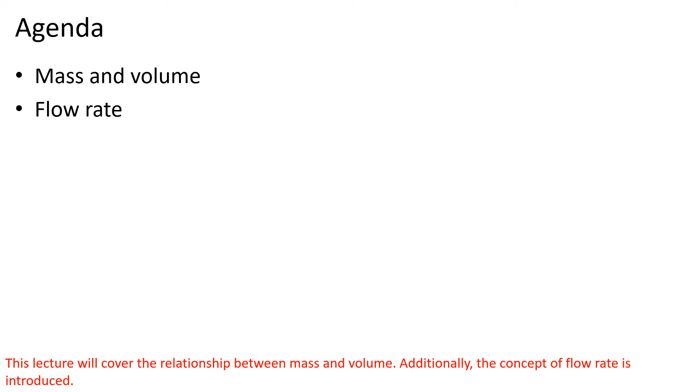Density is an intensive material property, equal to the ratio of mass to volume for a sample of the material. Being an intensive property, it is independent of the mass of material. Density is calculated by measuring volume and mass for a given sample. The inverse of density is referred to as the specific volume and is equal to the ratio of volume to mass. Common units for density are kilograms per cubic meter and pounds mass per cubic foot.

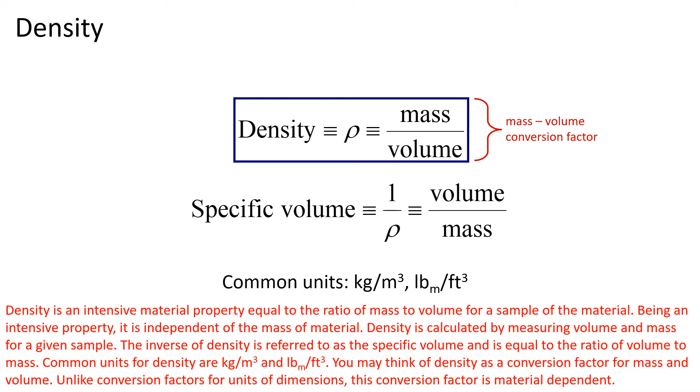You may think of density as a conversion factor for mass and volume. Unlike conversion factors for units of dimensions, this conversion factor is material dependent. Density is material dependent, but also depends on temperature and pressure. The density of a liquid or solid is slightly dependent on temperature and pressure. The temperature dependence typically is greater.

Gas density is strongly dependent on pressure and temperature. The dependence is given approximately by the ideal gas law as density is equal to the pressure divided by the ideal gas constant R divided by temperature.

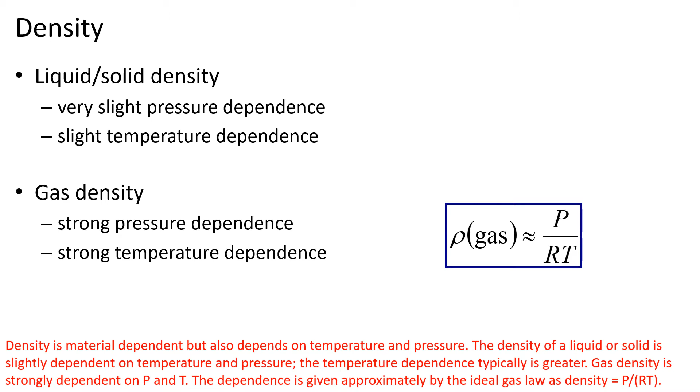Values for density commonly are reported in reference books or the literature as specific gravities. Specific gravity is equal to the material density divided by a reference density. It may be considered a relative density. Specific gravity is abbreviated as SG. The value for the reference density must be provided along with the specific gravity to calculate density from specific gravity.

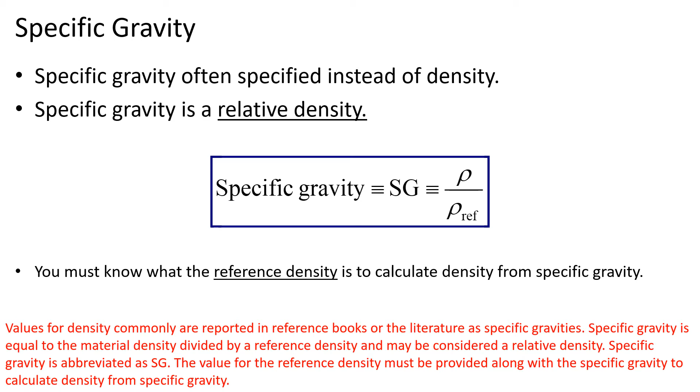Commonly, the density of water at 4 centigrade is used as the reference density. At 4 degrees C, water has a density of 1,000 kilograms per cubic meter or 62.4 pounds mass per cubic foot. The notation SG(20°/4°) is used to indicate the reported specific gravity is for a material density measured at 20 degrees C, and a reference density of water at 4 degrees C.

To calculate the specific gravity for a material at 20 degrees C using water as a reference at 4 degrees C, the density at 20 degrees C in units of kilograms per cubic meter is divided by 1,000 kilograms per cubic meter. Note that specific gravity is dimensionless.

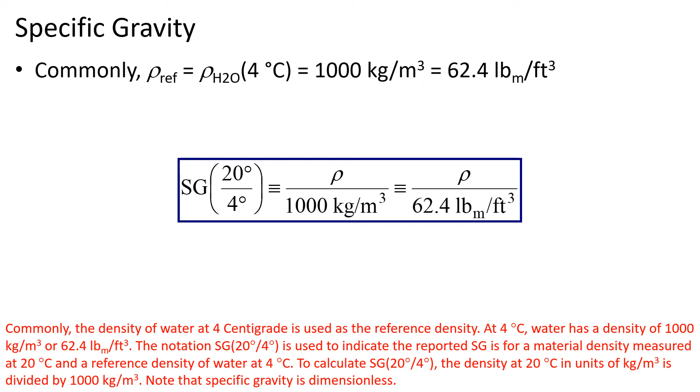In Lecture 1, we introduced the general process flow diagram above to illustrate a generic process for converting raw materials into higher value products. Most processes will consist of a reaction section in which a chemical or physical transformation converts some of the raw material into the desired products, and a separation section in which the desired products are purified. For continuous processes, the sections are connected by pipes, and material flows within each section and between them through pipes. To design such processes, we must understand the terminology for specifying flow rates in pipes.

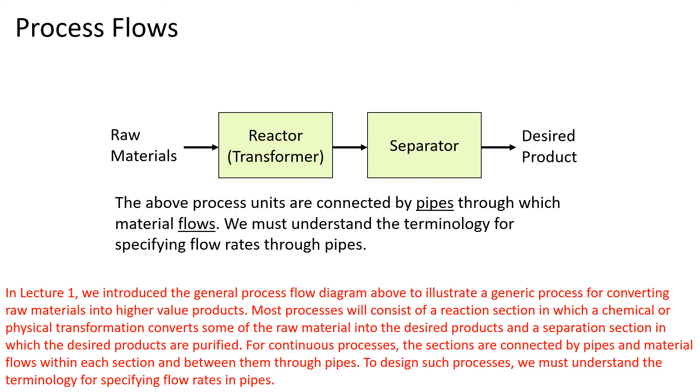Flow rate is the rate at which material moves. A rate is defined to be an amount divided by a time. Two types of flow rates are used in engineering calculations: mass and volume. Mass flow rate is the amount of mass that flows divided by the time interval over which the flow occurred. Similarly, volumetric flow rate is the ratio of volume that flows to the time interval over which the flow occurred.

Density is used to convert a mass to volume flow rate and vice versa. Note that a dot over the letter M or V is used to differentiate flow from amount, and we will refer to mass flow rate as M dot and volume flow rate as V dot.

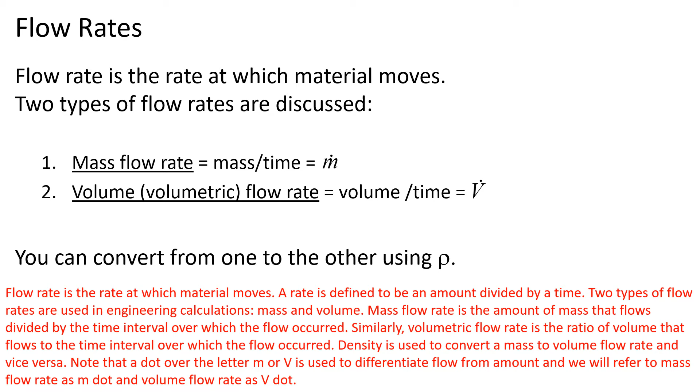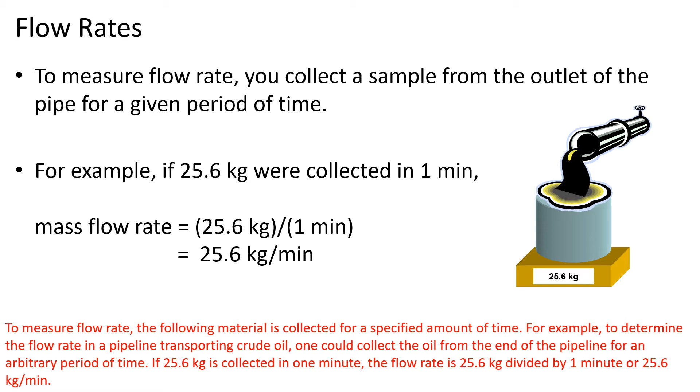To measure flow rate, the flowing material is collected for a specified amount of time. For example, to determine the flow rate in a pipeline transporting crude oil, one could collect the oil from the end of the pipeline for an arbitrary period of time. If 25.6 kilograms is collected in 1 minute, the flow rate is 25.6 kilograms divided by 1 minute, or 25.6 kilograms per minute.

If volume is measured instead of mass, the volumetric flow rate can be calculated from volume divided by time. If both measurements are made, mass and volumetric flow rate can be calculated. Dividing the calculated mass flow rate by the volumetric flow rate, the collection time used for the measurement cancels to yield the ratio of mass to volume, the material density. Thus, mass flow rate is equal to volumetric flow rate multiplied by density, just as mass is equal to volume multiplied by density.

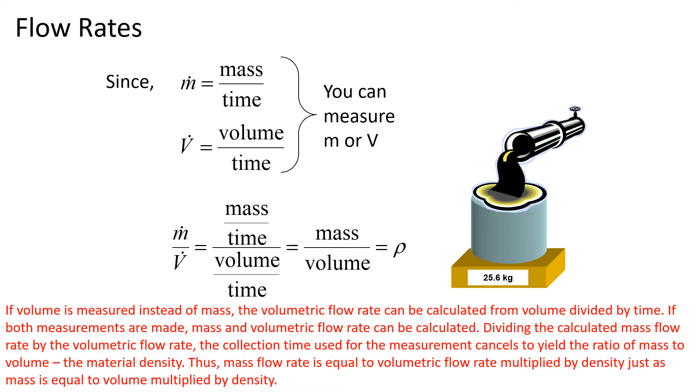Instead of volumetric flow rate, bulk velocity, V sub B, may be used to specify flow rate. The cross-sectional area of the pipe also must be provided to calculate flow rate. Longitudinal, along the z-axis of the pipe, and transverse cross-sections of the pipe are shown here on the left and right respectively. The diameter of the pipe is given as 2 times r, where r is the pipe radius.

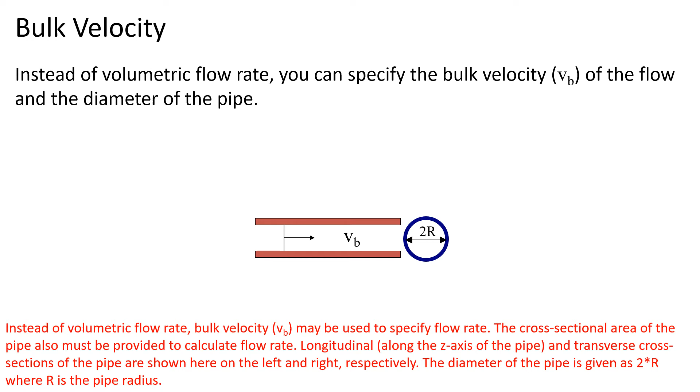To understand the relationship between volumetric flow rate and bulk velocity, imagine a piston pushing material through the pipe. The piston moves with a velocity equal to v sub b. In a time interval t, the piston will move a distance L, equal to v sub b times t, or equivalently, t is equal to L divided by v sub b. The volume displaced by the piston is equal to the volume of a cylinder with diameter 2r and length L, or equivalently, V is equal to pi times r squared times L.

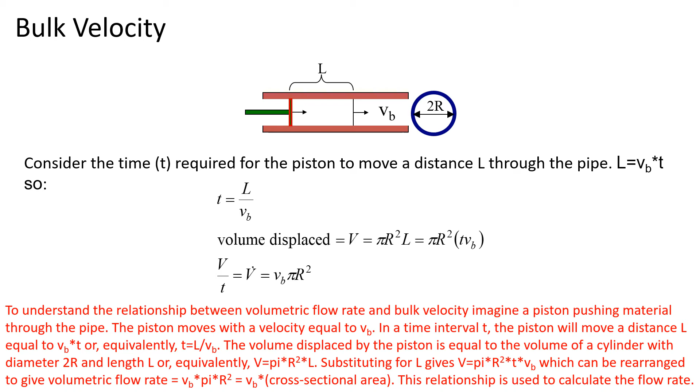Substituting for L gives V is equal to pi times r squared times t times v sub b, which can be rearranged to give volumetric flow rate is equal to v sub b times pi times r squared, which also equals v sub b times the cross-sectional area. This relationship is used to calculate the flow rate.

Process streams commonly are mixtures of different chemical species. We will differentiate the flow rate of a specific component from the total flow rate of the stream through a subscript on the flow rate. The flow rate of an arbitrary component I is referred to as m dot sub I.

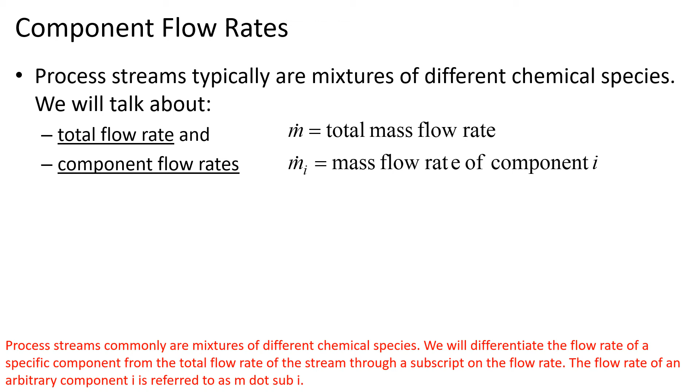If a stream consists of water and methanol, the total flow rate of the stream is given by m dot. Using the letter W to represent water, the flow rate of water in the stream is given by m dot sub W. Likewise, using the letter M to represent methanol, the flow rate of methanol is given by m dot sub M.

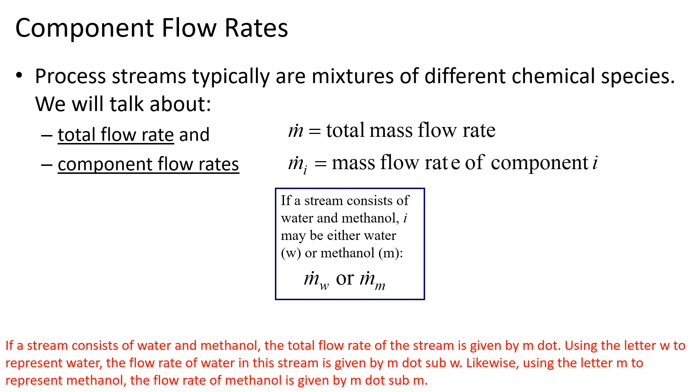The flow rate of a component can be calculated from the total mass or volumetric flow rate. The flow rate of a component I is equal to the total mass flow rate, m dot, multiplied by the mass fraction of component I, x sub I. Mass fraction is defined as the fraction of the total mass which comes from component I. The flow rate of component I also can be calculated by multiplying the total volumetric flow rate by the concentration of component I, C sub I.

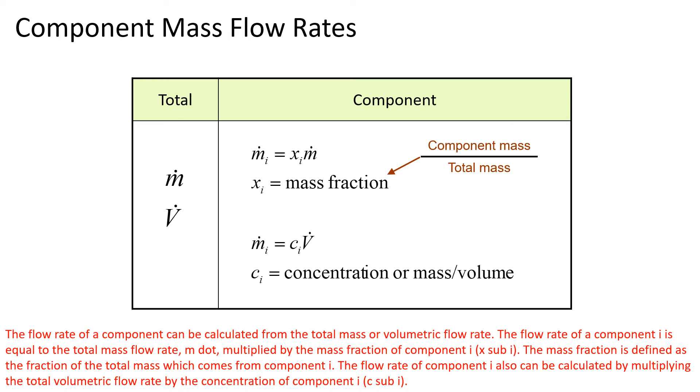Process calculations often require component flow rates in terms of moles instead of mass. The conversion requires knowledge of molecular weights, which are calculated from atomic weights. It is more accurate to speak of atomic mass and molecular mass since weight is a unit of force, but weight frequently is used. The mass of individual atoms is based on assigning a mass of 12 to carbon-12. Molecular weight is the sum of the atomic weights of all atoms contained in a molecule. Molecular weight often is represented by the letter M or letters MW.

The units of molecular weight may be grams per mole, kilograms per kilomole, or pounds per pound mole. The numerical value does not depend on which units are used. A gram mole is the amount of material that has a mass in grams equal to its molecular weight. 1 gram mole contains approximately 6.02 times 10 to the power 23 molecules. This value is defined to be Avogadro's number. Note the conversion factors between moles, kilomoles, and pound moles have the same numerical values as those for grams, kilograms, and pounds.

For example, the molecular weight of an oxygen molecule, O2, is equal to 2 times the atomic weight of an oxygen atom, and is equal to 2 times 16, or 32. The units may be grams per mole, kilograms per kmol, or pounds mass per pound mole. The equality of the values for molecular weight requires that 1 kmol equal 1,000 moles, and 1 kmol equal 2.205 pound moles.

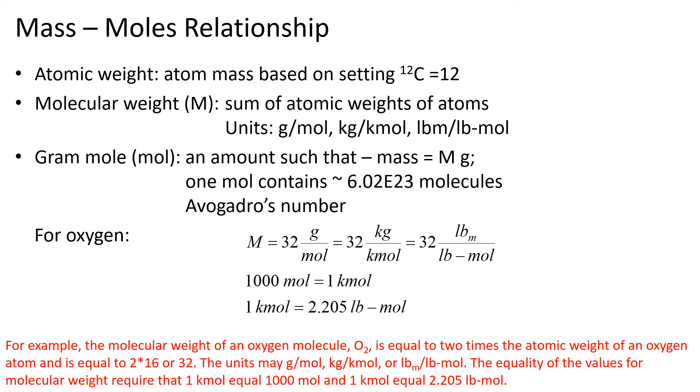Molecular weight will be used to calculate the number of pound moles in 1,000 grams of water. The molecular weight of water is 18 grams per mole, or 18 pounds mass per pound mole. The mass of an arbitrary component I is equal to moles of that component multiplied by the molecular weight. Thus, the moles of water can be calculated by dividing the mass by the molecular weight. Doing so and converting moles to pound moles yields 0.1225 pound moles.

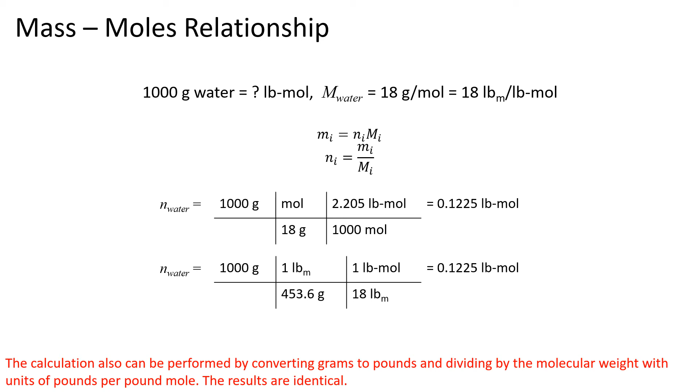The calculation also can be performed by converting grams to pounds and dividing by the molecular weight with units of pounds per pound mole. The results are identical. Note that the same relationships exist between molar flow rate of component I, N dot sub I, and mass flow rate, M dot sub I. The conversion of a mass flow rate of water in units of grams per minute to a molar flow rate in units of pound moles per minute is identical to the conversion of a mass in grams to pound moles.

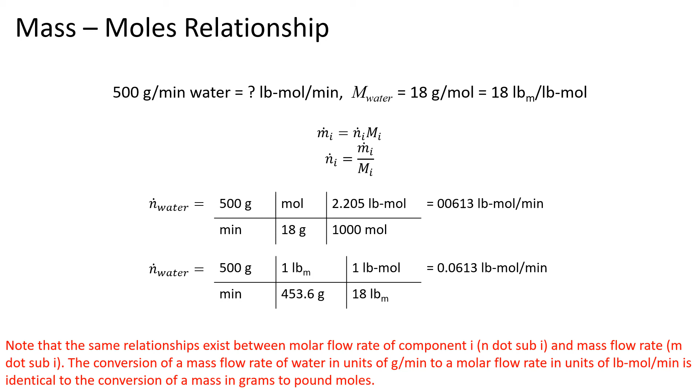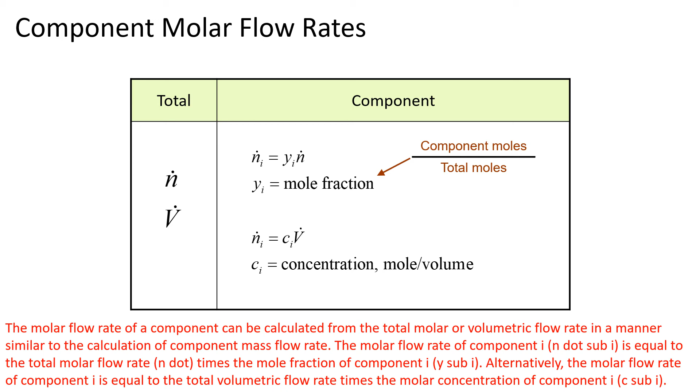The molar flow rate of a component can be calculated from the total molar or volumetric flow rate in a manner similar to the calculation of component mass flow rate. The molar flow rate of component I, N dot sub I, is equal to the total molar flow rate, N dot, times the mole fraction of component I, Y sub I. Alternatively, the molar flow rate of component I is equal to the total volumetric flow rate times the molar concentration of component I, C sub I.

The relationships between mass and volume, total mass or volume and component mass, total moles or volume and component moles, and mass and moles are summarized in the table here. The equations for an amount and flow rate are of the same form and are given by replacing the amount by the corresponding flow. For example, the equations for mass flow rate, M dot, are given by replacing the mass M by mass flow rate, M dot. These relationships will be required to perform process calculations.

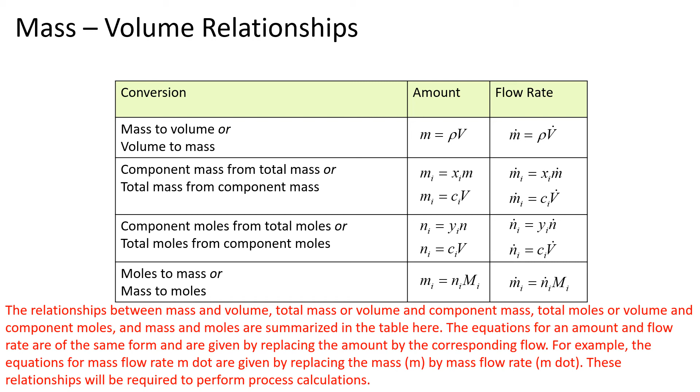The use of these equations is illustrated in this example. 4 different flow rates will be calculated. The flow rate and composition of stream 1 are provided. The total mass flow rate is 1,200 kilograms per hour, and the stream is a binary mixture of water and nitrogen. The mass fraction of water is 0.1, and the mass fraction of nitrogen is 0.9. Note that the sum of the mass fractions of all components in any stream must be equal to 1. This is true here, as 0.1 plus 0.9 equals 1.

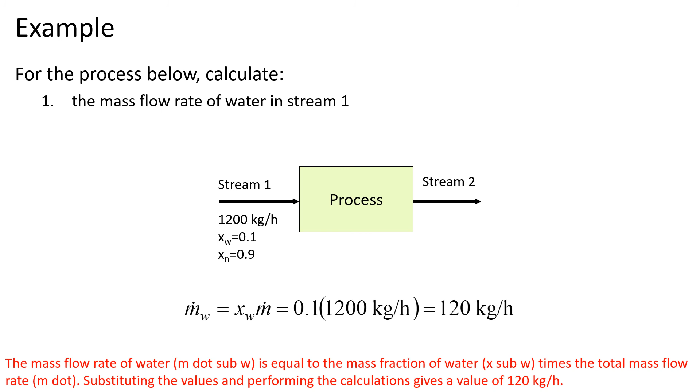The mass flow rate of water, M dot sub W, is equal to the mass fraction of water, X sub W, times the total mass flow rate, M dot. Substituting the values and performing the calculations gives a value of 120 kilograms per hour. The mass flow rate of nitrogen, M dot sub N, is equal to the mass fraction of nitrogen, X sub N, times the total mass flow rate, M dot. Substituting the values and performing the calculations gives a value of 1,080 kilograms per hour.

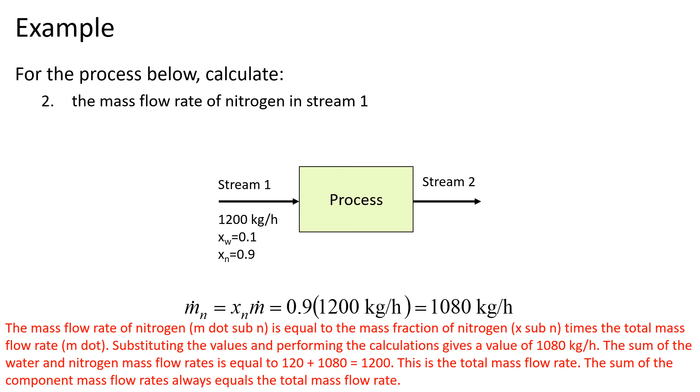The sum of the water and nitrogen mass flow rates is equal to 120 plus 1,080, which is equal to 1,200. This is the total mass flow rate. The sum of the component mass flow rates always equals the total mass flow rate. The molar flow rate of water, N dot sub W, is equal to the mass flow rate of water, M dot sub W, divided by the molecular weight of water, M sub W. Substituting the values and performing the calculations gives a value of 6.66 kmols per hour.

The total molar flow rate, N dot, is equal to the sum of the water molar flow rate and nitrogen molar flow rate. The water molar flow rate has been calculated. The nitrogen molar flow rate, N dot sub N, is equal to the nitrogen mass flow rate, M dot sub N, divided by the molecular weight of nitrogen, M sub N. Substituting the values and performing the calculations gives a value of 38.5 kmols per hour. Adding this to the water molar flow rate gives a total molar flow rate of 45.2 kmols per hour.

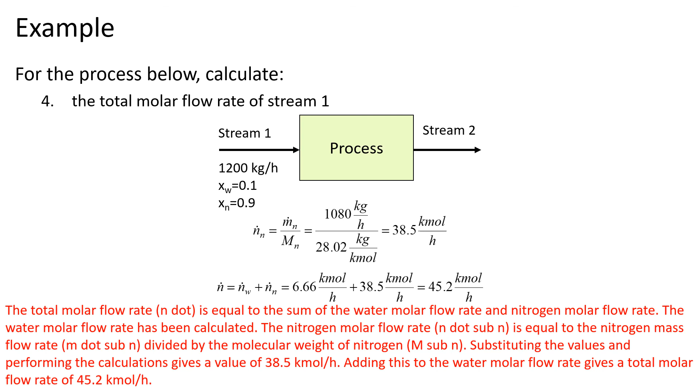Next time, we will discuss concentration calculations and volume additivity.